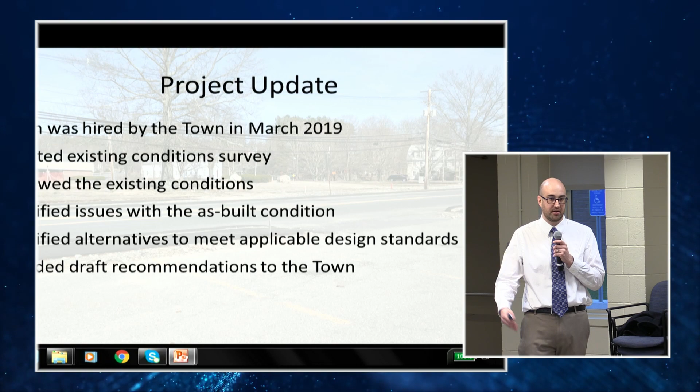Just to get started with a project update and what our role has been thus far: we were hired by the town in March of this year to start working on this project and really review the existing conditions and what's out there now as a result of the improvements constructed last summer and fall, and identify issues that had been previously identified by the town. We've also reviewed the project to identify a few additional issues we found with what we see out there today on the ground. We were also asked to identify alternatives and different ways we could go about fixing some of those design issues previously identified by the town and also by us through our review of the project.

You may have seen our surveyors out there in late March, early April. We got some additional topographic survey to really pick up all the different improvements that had already been constructed. We blended that in with some of the existing base mapping.

We also utilized an as-built survey conducted by the contractor for the roadway surface, and used all that survey information as part of our analysis of the existing condition out there now.

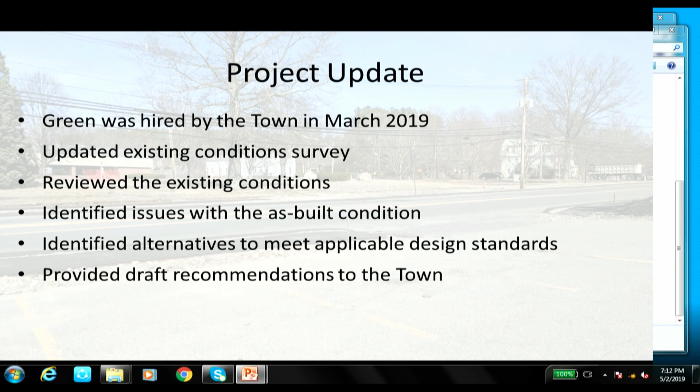We also used that information in our development of the alternatives moving forward for this project. Since that time, we looked at the project from end to end, and we were able to provide draft recommendations to the town earlier this month on the best steps forward for this project.

So some major issues had been identified with the project. First and foremost, the ponding on the roadway. It had been noted that because of some of the roadway cross slopes, profile slopes, and locations of the catch basins, not all the water getting to the roadway was really getting into the closed drainage system installed in the catch basins.

Also, potential ADA issues. We have constructed new sidewalks along both sides of Great Road, and there are some potential ADA issues with those sidewalks. Turning movements at White Pond Road is another concern.

Larger vehicles, especially trying to take that right turn from Great Road onto White Pond Road, has been identified as a concern. Also, various grading and drainage issues on the abutting properties, particularly on the south side, were identified as issues.

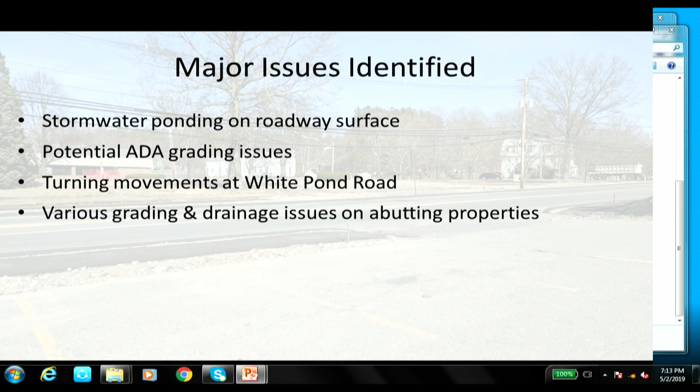So before I get into some of our analysis and the alternatives that we proposed, I just want to go over a brief overview of some of the design criteria that we used in our evaluations and what we would use on a typical project of this nature.

First, the first standard that we would use in Massachusetts is the Mass DOT Project Development and Design Guide. That is a standard that talks about all sorts of different aspects of roadway design that Mass DOT uses on all of their projects.

And we use on a typical project like this for a municipality ourselves. A lot of what is in the Mass DOT Design Guide is also informed by what is called the AASHTO Green Book, which is a policy on the geometric design of roadways.

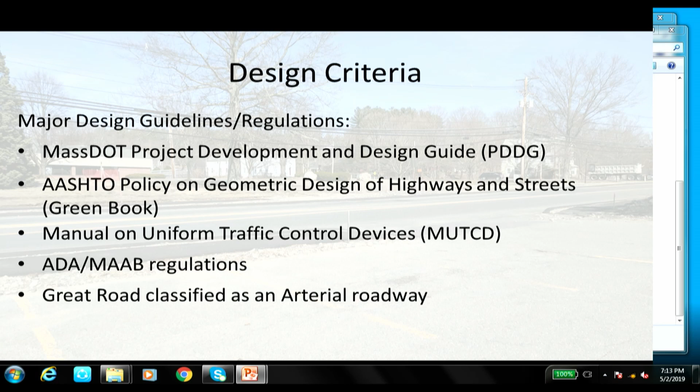AASHTO is a national organization that also develops policy for other aspects of roadway design as well that would be applicable to this project.

MUTCD controls traffic control devices, so your signs, pavement markings, traffic signals, not that there's one on this project, but all those traffic control devices are governed by what's in MUTCD.

That's a national standard. Also, the ADA regulations and Massachusetts Architectural Access Board regulations for handicap accessibility and people with disabilities, accessibility for all those, for everyone really.

And also, just one kind of aspect that plays into a lot of our recommendations and analysis is that Great Road is considered an arterial roadway. If you look at the overall transportation system, you start at your local roads, which are your smallest roads.

And you work all the way up through collectors, arterials, and then interstates and freeways as your biggest classification. So an arterial roadway is considered a major component of the transportation system and the traffic circulation system for the area.

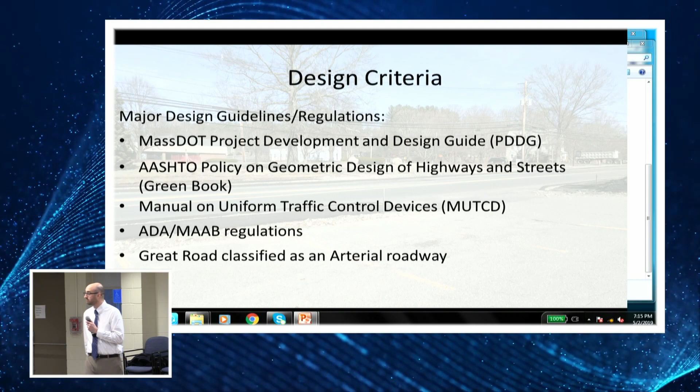So the first issue that we really looked at was the roadway drainage, and we looked at the as-built condition. What we found was that there are a lot of flat cross slopes, so that's from the center of the road down to the gutter line. We found a lot of cross slopes that are close to flat or very flat, below standard.

We would typically want to see a 2% cross slope. We've identified a minimum for this project of 1% cross slope. We've also found some very flat profile grades, or running slope, along the roadway. Typically what we would see is at least 0.5%, which is what we design to.

Again, we're seeing some areas where the profile slope is less than 0.5%, down to 0.3 to 0.4%. That's contributing to a lot of the ponding on the roadway that we're seeing, and the water not running and getting to the catch basins that are out there today.

What we did was an inlet analysis, and when we do an inlet analysis, we determine what's considered the roadway spread, which is how far during a storm event the water will pond at the gutter line and take up part of the roadway.

And what we found is that the spread is about 10 feet during the 10-year storm, and that is the design standard that we would design to, the 10-year storm. And the maximum allowed for an arterial roadway is 8 feet.

In addition to that, at the low points of the roadway, near the abandoned gas station and near Citizens Bank, those low points you would design for a 50-year storm per Mass DOT standards. And again, in the 50-year storm, we're seeing spreads at that low point that basically would go all the way across the roadway. So that is certainly not to Mass DOT standards.

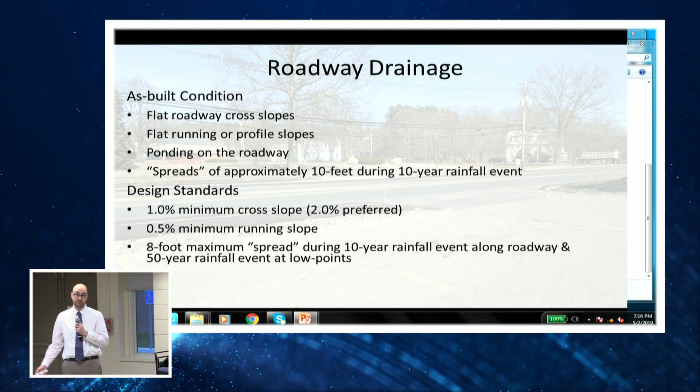So to fix the ponding and the main issue that we were asked to look at and evaluate for this project, we looked at 3 different options. One would be full depth reconstruction, which would mean removing all the pavement and basically reconstructing the road from where the post office is, all the way down to White Pond Road.

There's obviously some construction costs associated with that, but what that would do is allow us to get the proper profile grade of the roadway, minimum of 0.5% throughout the project limits, and also allow us to get a 2% cross slope, which is the desired cross slope, and help with those spreads that I was just talking about.

The second option that we looked at was a variable mill and overlay, which would basically mill part of the roadway and also install a pavement overlay, working with a lot of the existing pavement that we have there today, and be able to obtain cross slopes of at least 1% and a minimum profile slope of 0.5%.

The third alternative we looked at was basically just adding more inlets and more catch basins in order to capture that stormwater and get it off the roadway and into the closed drainage system.

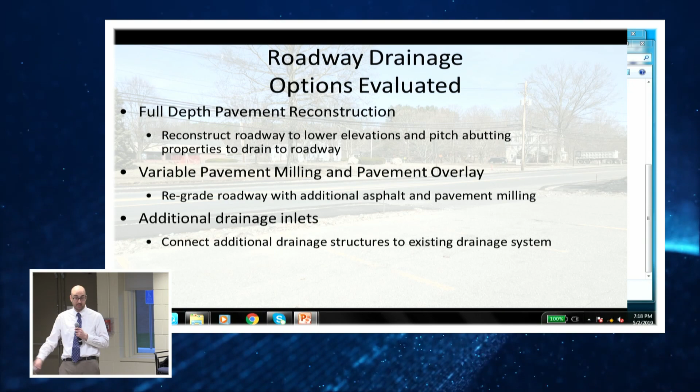So what our recommendation to the town has been is a combination of those last two alternatives, which is to do a variable mill and overlay between the post office and White Pond Road. That'll get you the desired cross slopes for the roadway and the desired profile grade, and also add 9 additional drainage structures between the post office and White Pond Road.

2 of those drainage structures would go at the low point, and those are what we call flanking catch basins. Those do 2 things: they help us obtain those desired spreads less than 8 feet at the low point during that 50-year storm. They also act as backups.

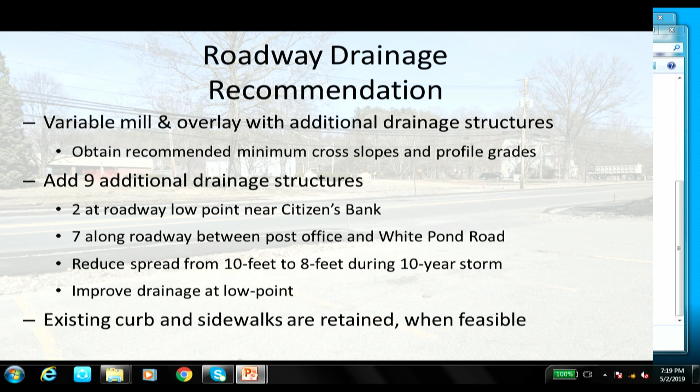This is a typical thing that Mass DOT will do on all their projects. If the low points were to ever get clogged, those catch basins are just upstream of the low point, and they act as basically a backup overflow for those low points, to help reduce any risk there if those low points were to clog.

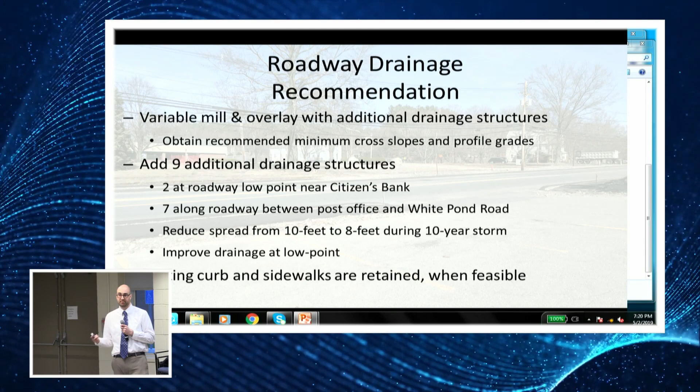Based on our analysis, this will reduce the spreads to the allowable per Mass DOT regulations, which is under 8 feet during the 10-year storm, and also get that desired spread at the low point during the 50-year storm. Another benefit to this is we can utilize a lot of the existing curb and keep a lot of the existing sidewalk that has already been installed, and not have to rip that up, which is something that would have to be done if we did a full depth reconstruction of the roadway.

Something else that we also looked at was the closed drainage system and the capacity of that. What was installed last summer was a mixture of 12 and 15-inch reinforced concrete pipes, and that drainage system outlets at the low point. As you head east towards Maynard, there's a low point in the roadway about 800 feet east of the project limits, and that's where that existing drainage system outlets.

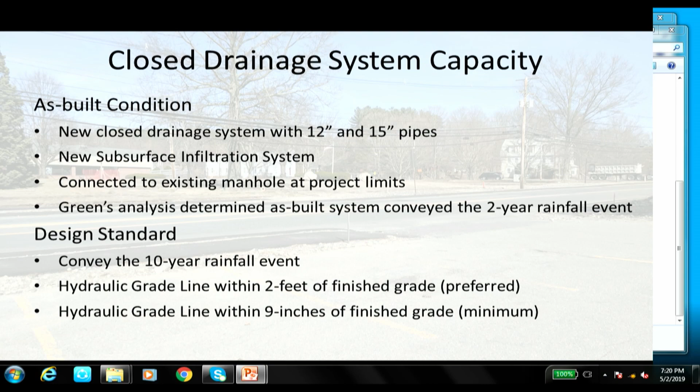There was also a new subsurface drainage system, an infiltration system, that was installed below the Stow Lower Common. And the drainage system connects to a manhole that is just east of White Pond Road.

We analyzed that drainage system to determine during a high storm event whether or not the system has enough capacity. The standard that we would look at for an arterial roadway is the 10-year storm. What we found in our analysis is that the system is only built to convey the 2-year storm, or just about conveys the 2-year storm is the best way to put that, and it would not convey the 10-year storm.

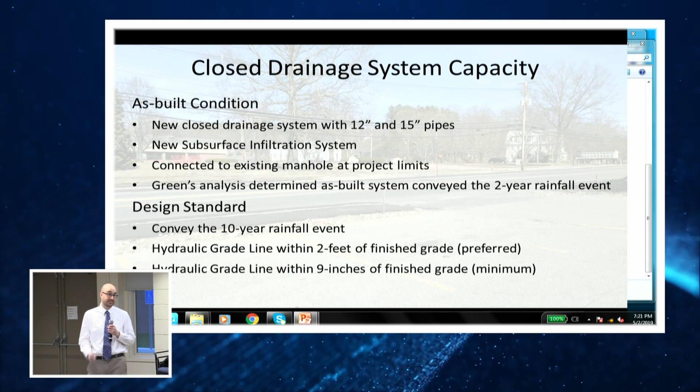So we evaluated two options to help mitigate that. The first option would just be to replace what had been installed, basically from the common all the way down to the low point. That's about 1,800 feet of pipe, and replace what had been installed, which was 15-inch pipe, with 18 and 24-inch pipe to get enough capacity in the drainage system.

The other alternative we looked at was expanding that infiltration system that was installed in the lower common last summer, and providing storage in that system to help accommodate the 10-year storm.

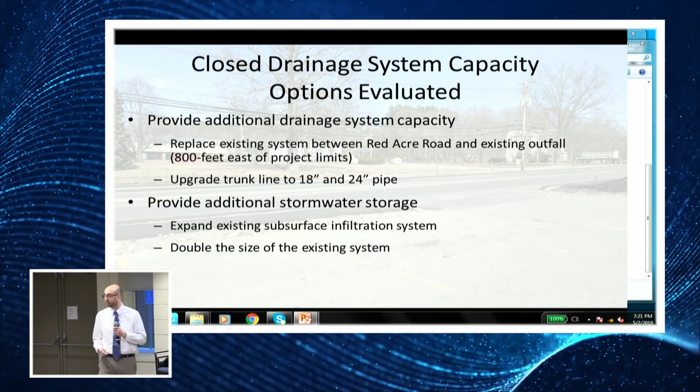What we found is both are technically feasible, both are options that could help solve the issue. The expansion of the infiltration system is something we estimate to be cheaper than upgrading the drainage trunk line to provide that capacity. There's also some additional environmental permitting that would go along with the upgrading of the drainage system. So our recommendation, what the town is looking to do, is expand that existing infiltration system.

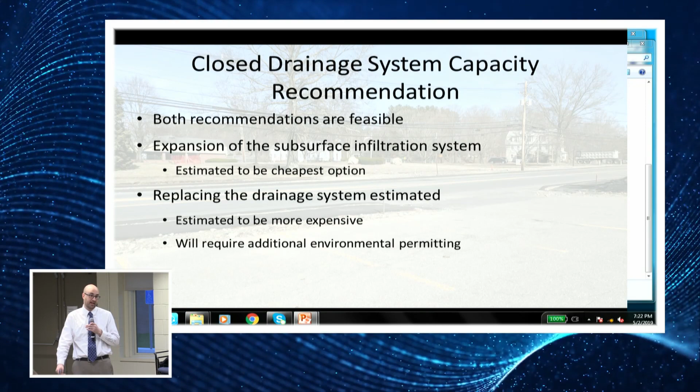A third issue that was identified was White Pond Road and the turning movements for large vehicles. White Pond is a local road classified by Mass DOT. It used to be what I'll describe as a Y intersection—you could go left or right, with an island in the middle. It was reconstructed as part of the project to be a T intersection, which is a traditional intersection, what we would typically try to design to today.

There are some benefits for pedestrians—it creates a shorter crossing. It also lowers vehicle speeds at the intersection itself.

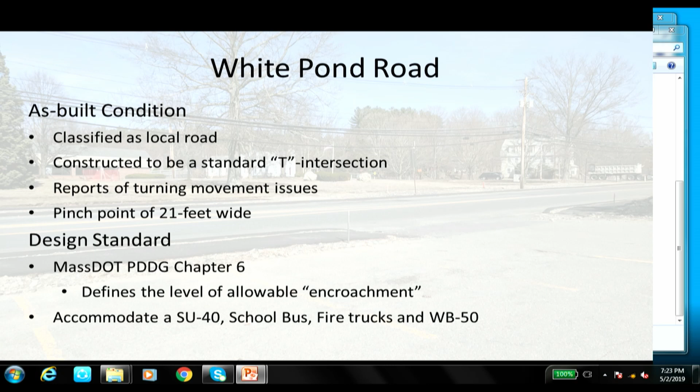After the intersection was constructed, there were reports of larger trucks, especially having difficulty making the right-hand turn from Great Road onto White Pond Road. What we found in our analysis is that White Pond Road is 24 feet wide, and based on the geometry that was designed, there was a pinch point which constricted the road down to 21 feet.

That is what we feel is the real issue with some of the larger truck turning movements you're seeing out there. The design standards—Mass DOT has actually some very good guidance, better than a lot of other states, on truck turning movements and what sort of accommodations you would provide for certain size vehicles. What we'll call encroachment is when a vehicle needs to take another lane, whether it's a lane in their same direction or a lane in an opposing direction of travel, in order to complete a turn.

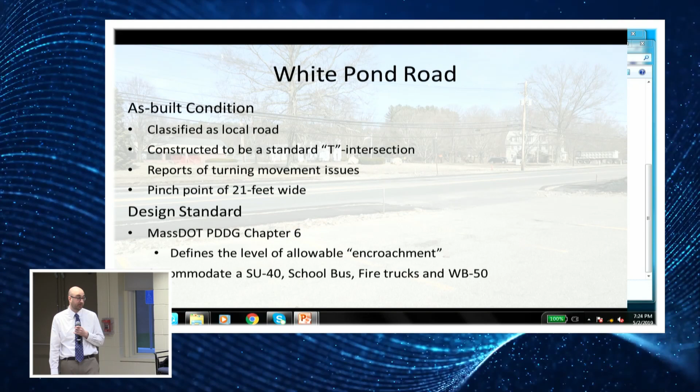They have different levels of accommodation for an SU-40 vehicle, which is a single unit truck—think of your typical Jordan's Furniture delivery truck, school buses, fire trucks—and a WB-50, which is a larger tractor trailer articulating truck. So we evaluated two options there.

One is a small geometry modification to get rid of that constriction in the curb line and to eliminate encroachment for the SU-40, the school buses, and also the fire trucks. This would meet Mass DOT standards for this intersection being an arterial intersecting with a local road.

We also looked at an alternative which would create a wider roadway and intersection geometry, which would also accommodate a WB-50 without any encroachment. That does have some additional impacts to the abutters, and it would also exceed the typical design standards for this intersection.

We looked at all ways vehicles would take rights and lefts from all different directions. We mainly look at the right turns because those are the hardest ones for larger vehicles to take—specifically the right turn from Great Road onto White Pond, and the turn from White Pond onto Great Road. We determined there was no real feasible option to fully accommodate the right turns from White Pond onto Great Road without some really additional impacts to the abutters on that side.

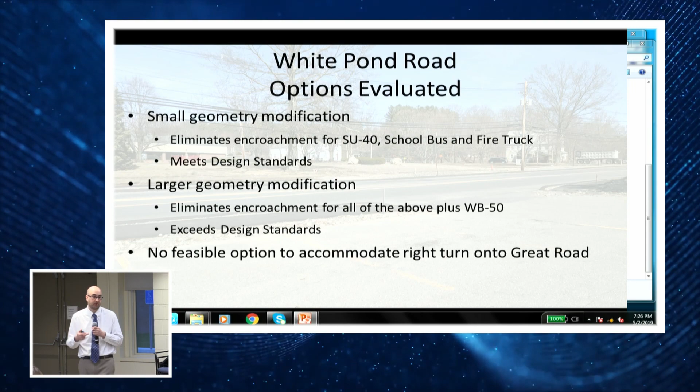We compared it to the pre-construction condition, and what's out there today is really no worse than it was prior to construction. So our recommendation to the town is to make a small geometry modification, which will accommodate the SU-40s, the fire trucks, and the school buses.

That will be without any encroachment into any of the oncoming lanes. A WB-50 would have to encroach into White Pond Road right at the intersection. This would meet Mass DOT standards.

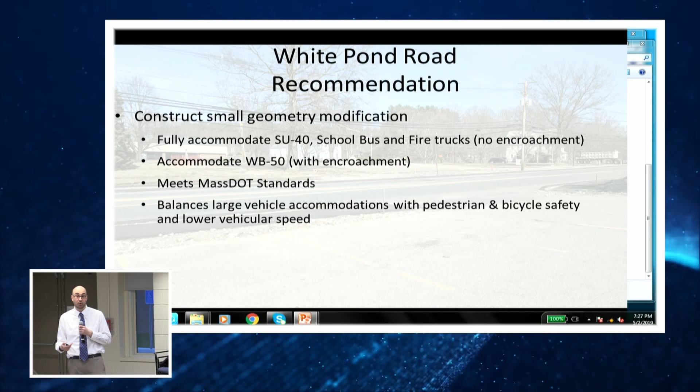With an arterial meeting a local road, you don't expect a WB-50 to be going through that intersection all that often, and there is a certain level of guidance on that, and that is an acceptable level of service for those larger vehicles. This also helps balance the need to accommodate larger vehicles with other goals of the project, such as pedestrian and bicycle safety, and also with the Assabet River Trail recently being constructed just down White Pond Road and down connections on Great Road, as well as promoting lower vehicular speeds at the intersection itself.

One of the last larger issues we looked at was some of the issues with the abutting properties. In the as-built condition, we're seeing a steep slope from the sidewalk down into some of the abutting properties, particularly over where the Stow Cafe and next to the former Beef and Ale are located.

Some of the driveways are steeper than they used to be. We're also seeing some evidence of ponding at the back of sidewalk, because the sidewalk, especially on the south side of the roadway, is higher than the surrounding parking lots. We're seeing some ponding issues there and some grading issues there.

Also in that same location by the Stow Cafe and the Beef and Ale, because of how some of the improvements are out there right now, some of the parking stalls in that lot have been shortened, and some driveways were reduced to provide access management, which was part of the project and is still a typical thing you want to do - manage the access and size of these driveways to help define where a car enters a parking lot versus where a pedestrian is on the sidewalk. That's why some driveways were reduced, and some were also experiencing issues with larger turning vehicles, in addition to White Pond Road.

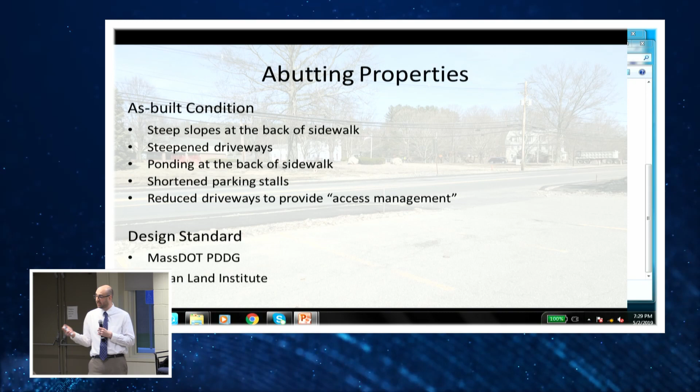There are some standards that govern this, not as much as the roadway geometrics, but Mass DOT has some guidance on these aspects, and the Urban Land Institute also has guidance on how to treat some of these conditions.

So we evaluated each of the abutting properties along the project. We looked at grading issues, we looked at drainage issues. In conjunction with our recommendation to the town for the overlay on the roadway itself, we've looked at how that will work with potential grading on the abutting properties, coming up with a design that will have appropriate grades on the driveway, while also allowing all driveways to pitch to drain, whether to the roadway or back onto the property to an existing catch basin or sheeting off the parking lot - basically to not create any drainage issues on private property.

We are also looking to provide, in certain locations, a grass buffer between the back of the sidewalk and some of those properties, especially where there's a parking lot right up against the sidewalk. We're also looking at how the sidewalk elevations, which in some locations are a foot to almost a foot and a half higher than the parking lots and roadway curb, can be constructed to meet ADA compliance. So some of those sidewalks that were out there do need to be reconstructed and removed so the entire project can meet ADA regulations.

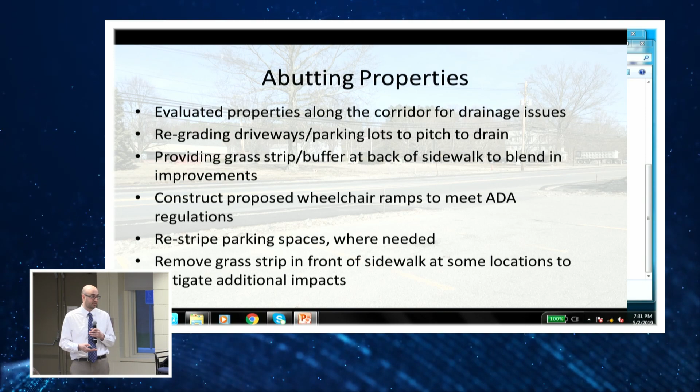We've also looked at those parking lots and the striping to make sure that what they had before - say an 18-foot parking stall - remains an 18-foot parking stall when improvements are completed, and also making sure they still have enough drive aisle width to allow for two-way operations within the parking lot. One recommendation we're making in select locations was to have a grass strip between the curb line and the sidewalk.

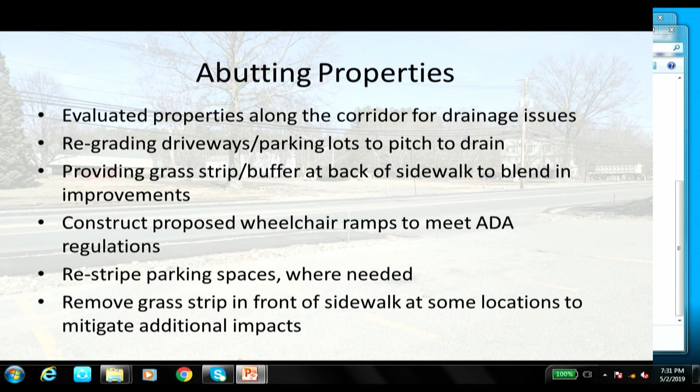Wherever possible, we want to maintain that. It provides a buffer between the pedestrians and the drivers, and that is both a safety and a pedestrian comfort issue, something we tried to design for. There are a few locations, due to some of the impacts to the abutters, where we're recommending that the grass strip be eliminated, but there would still be a grass strip at the back of sidewalk at those locations, between the sidewalk and the parking lots, so it's not one sea of asphalt. We are providing a grass strip, but that's with an eye to reduce impacts to the abutters, while tying in the improvements to what they currently have on their property.

So with that, that's basically a summary of our recommendations to the town, and I'll turn it back over to Jesse to complete the presentation.

I just want to make sure, in case anyone does have to leave here. Do you have the clicker? Here it is, thank you. That wasn't it. I'm going to rely on you to tell me how to use this one. Get our money's worth - you broke it. We're going to do that the old-fashioned way.

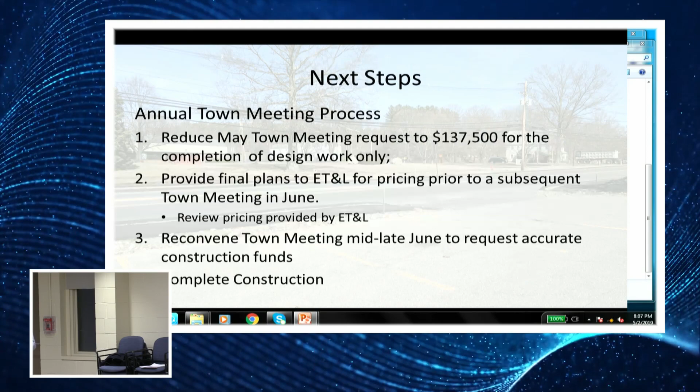Next steps. So we talked about the next steps in project design. If you just want to go to the next slide for me. So what I want to describe here is what the annual town meeting process looked like.

So everybody got in their warrant, unfortunately, a warrant that stated Article 34 with a target on it for $500,000. That was a plug number we used early on in this project before we were able to get a report from Green and to really understand the technical nature of the issues that we were expecting and planning to deal with.

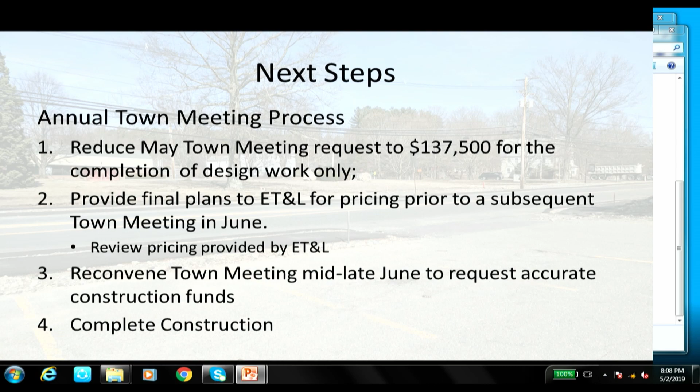So I'll get into the construction costs in a second, but the approach we felt made a lot of sense was that we could potentially break the town meeting up into two pieces. We could go forward at this town meeting with costs focused on design. Inside the $137,500 cost is really a year's worth of legal costs, the remaining design contract with Green to get us to 100% design construction plans, some incidentals, meetings, and questions we're still working on as we go through the alternatives. So the purpose of that $137,000 would be to get us to the point when we have final construction plans.

The next step after that, we know what it was like in May 2017 when we were struggling to get an estimate all the way up to town meeting, and clearly an estimate that was not accurate. Our goal this time is to make sure we've done the necessary design alternative analysis, worked with our project team, with Places Associates, and with our contractor ET&L to understand if the alternatives we've chosen are feasible and constructible, and whether we're all on the same page. Then we can get a number that really reflects the actual construction costs so we're not in the same position as 2017, hoping an estimate will hold. We want to be that much more certain about the costs going forward with construction. And quite frankly, we're just not there yet.

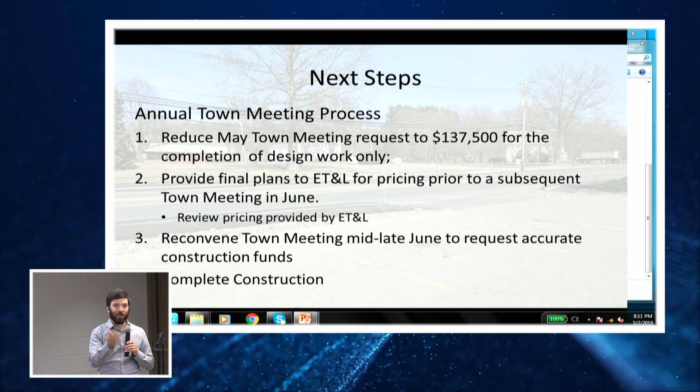Green provided us what we did not know before, which was that the closed drainage system was built to the 2-year storm. So Green said we can either replace some of the pipes or enlarge the infiltration system. This is something we're right now trying to focus on. It sounds like we're believing and agree with Green's idea that the infiltration system may be the cheaper and more feasible option, so that's what we're doing right now. That's why this number is likely going to be bigger than 890. Our thinking right now is that it'll be somewhere just north of $1 million when we come back to town meeting. I provide that so there's no sticker shock when we get there, but we're still trying to figure out what those costs look like. The reason for those costs is everything that Green just described.

Obviously, we have some mixed emotions here. We're incredibly disappointed. This was a long-time project of the planning board, something we were more excited about than any other project we worked on, so to see it in this state is hard. At the same time, we're grateful that we've got somebody like Green and this new approach, and that we didn't finish the project when we were uncertain, and that we have an ability to go back and get it done right. So there's a couple sides of the coin here, and we understand both of them.

So that's the approach that we're planning to take at town meeting. I wanted to get that out there. I can try to answer questions as best I can about the mechanics of that, and we can certainly talk more about the technical aspects as well.

I was at the April 17th meeting where you explained how much money was spent for the design that is now defunct, and that this project, as reimagined over the winter, would be $150,000 for design, including $60,000 for supervision during construction by the designer, which is something that didn't happen last year. How does that jive with the 137.5?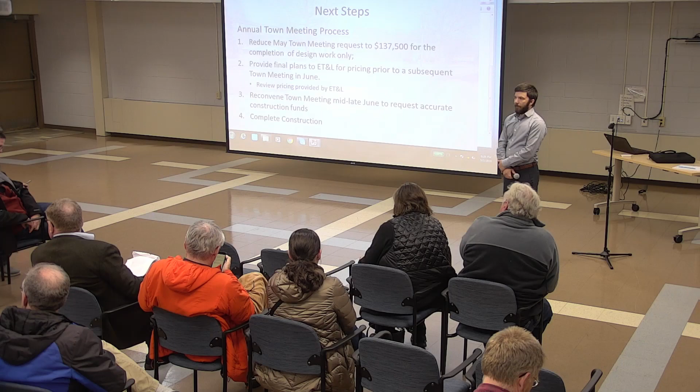Okay, thank you. We have that already. All right, do we have that figure already? It's in the warrant. I think he's right, it's like 170. Yeah, but the numbers in the warrant keep changing.

Let me ask just a few more questions on dollars and cents, and then one general question: how much do we owe Ms. Carter and Mr. Green's firms right through tonight? Are you asking how much we've paid them, or how much we have in bills payable? How much is payable? I'd like to hear from them, and I know you don't have a bill in your pocket, but if you can ballpark it.

I can say that we recently paid an estimate, so I feel we're pretty solid. Just a couple of meetings that I've attended, so we're probably $100,000. I'm sorry? Probably $1,000 to $1,500. Okay, it hasn't been that much going right now.

Mr. Green, as far as what we've been paid so far? I think he's thinking of the delta between what we have paid you already and what you've accrued prior to your next invoice. Yeah, I just want to know what you think you're going to charge after tonight—not to say you're going to stop working after tonight, just want to get a sense.

After tonight, through design, through the rest of design? What do you have on the books if you put your time in tonight? I would say it's probably 20,000 or something. I don't know the exact number though. I'm not asking for the exact number, just trying to get a ballpark—smaller than a bread box, bigger than...